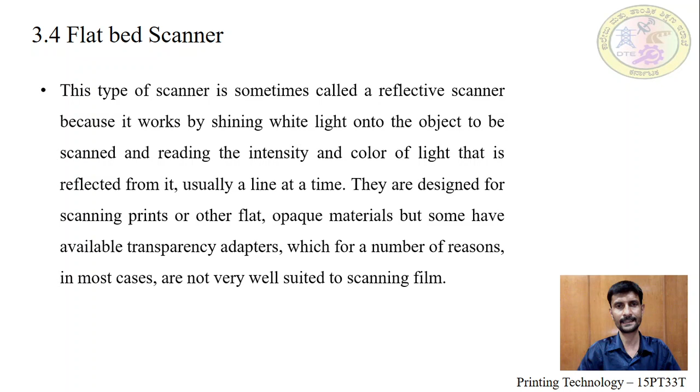It means the amount of light intensity and the reflected color decide the image quality. Prints or other flat substrates and opaque materials are also used for scanning purposes. Sometimes even transparency is also used, but the film is not suitable for scanning purposes.

Next, we will see the working principles of the flatbed scanner. Normally, it consists of a plain glass and then a light source made up of LED or xenon or cold cathode fluorescents, which illuminates this pane. This light source will move from this end to this end and after reflecting it captures the original document kept on the platform. Whatever the image is, the light source is reflected onto the mirror. According to that, it captures the image.

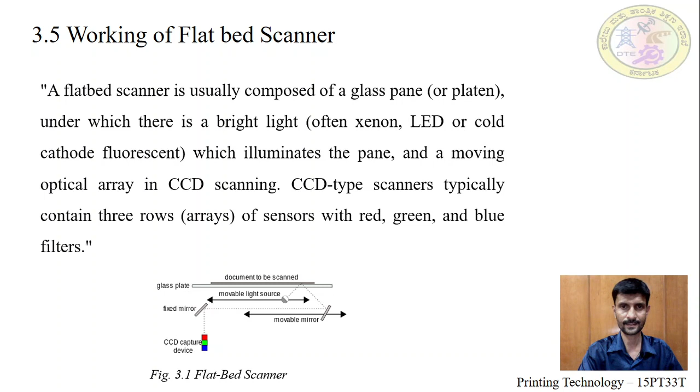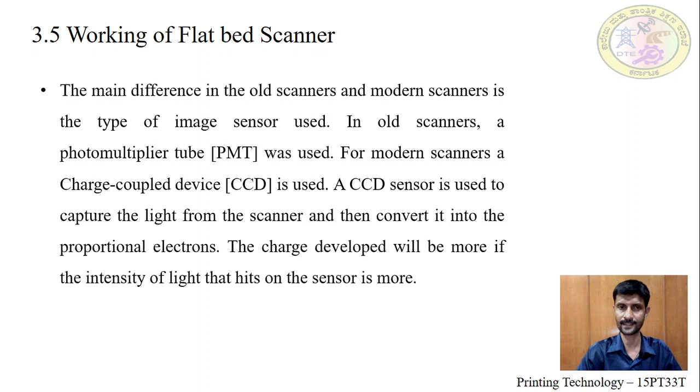The movable mirror also moves with the light source and then transfers this analog into electronic signals, captured through the CCD, charge coupled devices, which convert them into electrical signals as red, green, blue. The main difference is that in the old scanner a photomultiplier tube is used. In modern days, they use charge coupled devices, which are also inexpensive, and which convert the original into proportional electrons. The charge developed will be more if the intensity of light that hits the sensors is more.

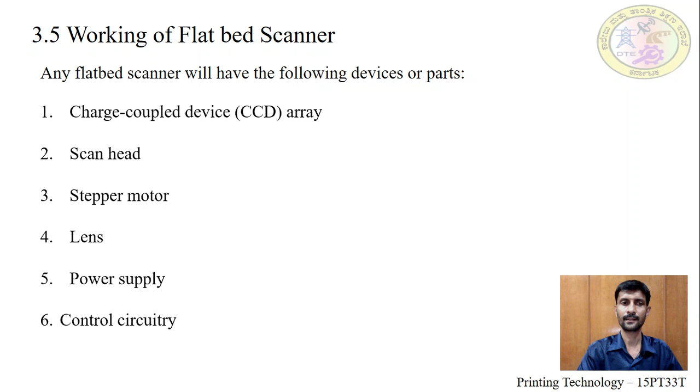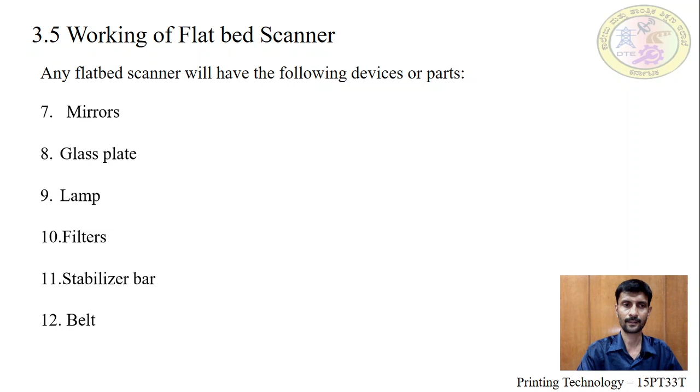Any flatbed scanner will have the following devices or parts. Normally, the charge coupled device is the main element of the scanner. Scanner head, stepper motor which moves the light source from one end to another end, lens, power supply, control circuit, interface port, mirrors, glass plates, lamps, filters, stabilizer bar, belt and cover.

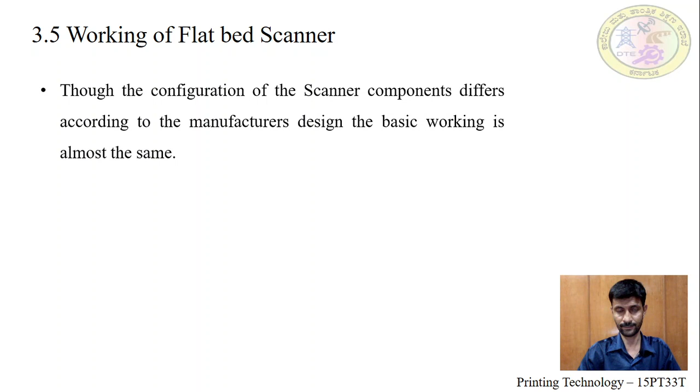Scanner components differ according to the manufacturer designs, but the basic working is almost the same. The scanner configurations of the company may differ, even the design also differs, but the working function is the same. A scanner consists of a flat transparent glass under which the CCD sensor, lamps, lens, filter and also mirrors are fixed. The document has to be placed on the glass.

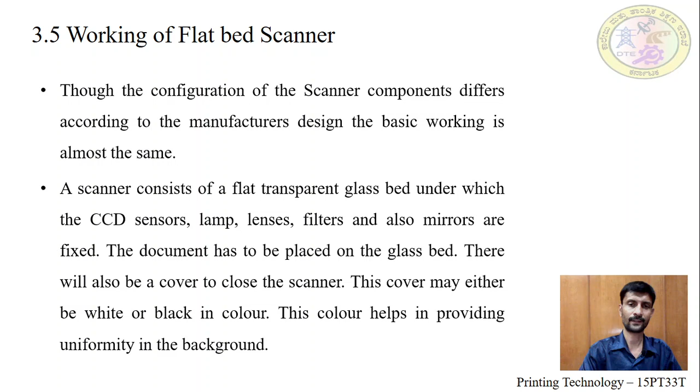There will also be a cover to close the scanner. This cover also plays a very vital role. It may be available in white and black color. It helps the uniformity of the background during scanning. The uniformity will help the scanner software to determine the size of the document to be scanned. If a page from a book is to be scanned, you may not be able to use the cover to close it. The lamp brightens up the text to be scanned.

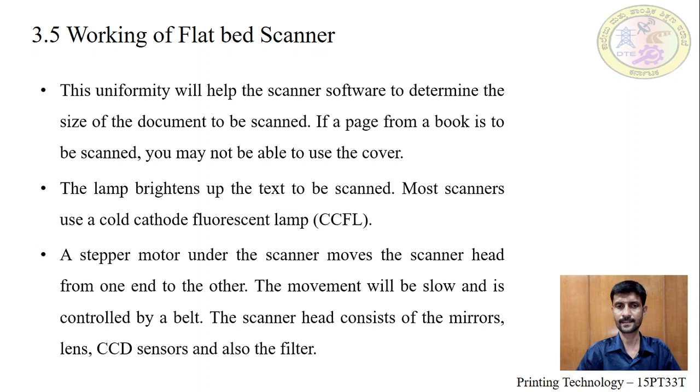Most scanners use cold cathode fluorescent lamps. The stepper motor will move the scanner head from one end to the other. The movement will be slow and it is controlled by a belt. The scanner head consists of mirrors, lens, CCD sensors and other filters. The scanner head moves parallel to the glass plate, and that too in a constant path. There are no changes in direction while traveling.

Deviation may occur in motion. The stabilizer bar will compensate for it. The scan head moves from one end of the machine to the other end. When it has reached the other end, scanning of the document has been completed.

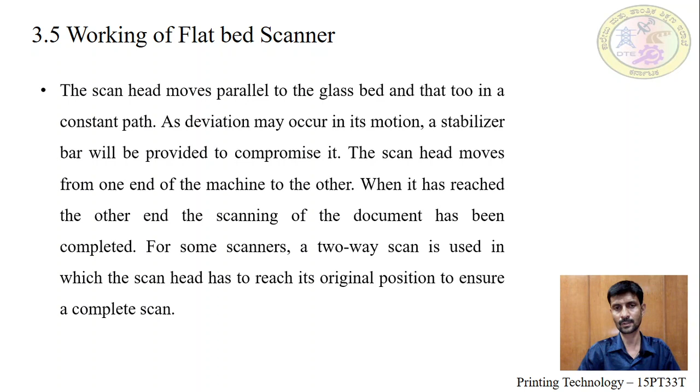For some scanners, two-way scanning is used, in which the scanner head has to reach its original position to ensure the complete scan. Single page scanning or back-to-back scanning is possible. In a single side scanner, when it transfers from one end to the other end, it completes the scanning function. If it is two-sided, when it goes from here to the other end, it again has to come back to its original position to scan the reverse side of the page.

The scanner head moves under a glass bed. The light from the lamp hits the document and it is reflected back with the help of mirrors angled to one another. According to the design of the device, there may be either two-way mirrors or three-way mirrors. The mirrors will be angled in such a way that the reflected image is hitting a smaller surface.

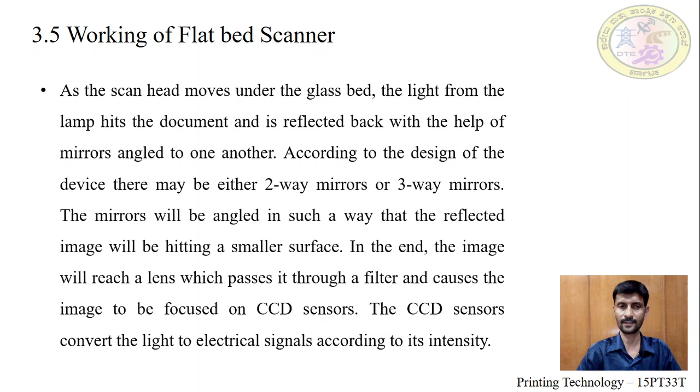In the end, the image will reach a lens which passes it through a filter and causes the image to be focused on the CCD sensors. The CCD sensors convert the light to electrical signals according to the intensity.

So this is another diagram which shows how flatbed scanners function. The original is kept on the flat glass. The light will reflect through the glass from the source according to the capturing.

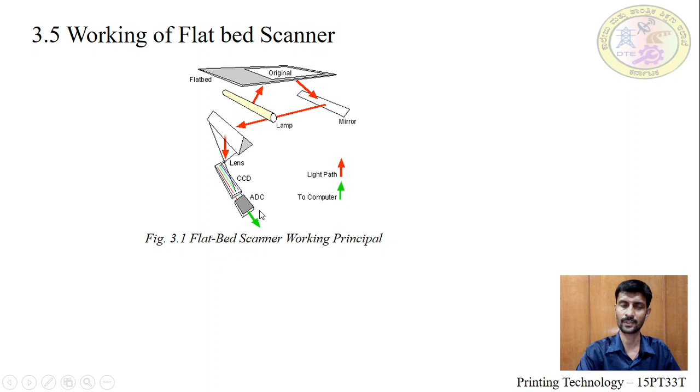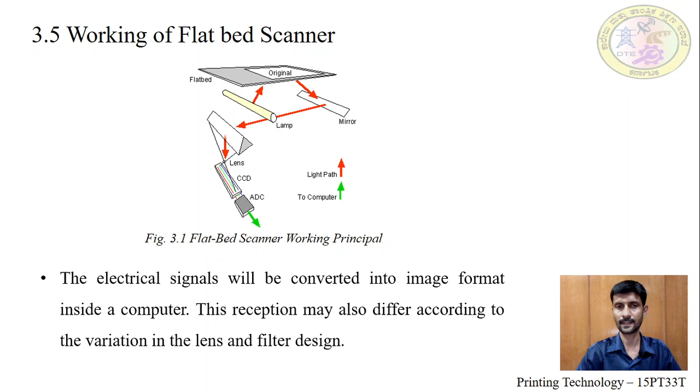It transfers to the mirror and then to the lens, and through the charge coupled device it captures the image, converts it to electrical signals, and finally sends it to the computer. The electrical signals will be converted into the image format inside the computer. The reception may also differ according to the variations in the lens and filter designs.

The method called three-pass scanning is commonly used, in which each movement of the scanner from one end to another allows each composite color to be passed between the lens and the CCD sensors. After the three composite colors are scanned, the scanner software assembles the three filtered images into one single color image.

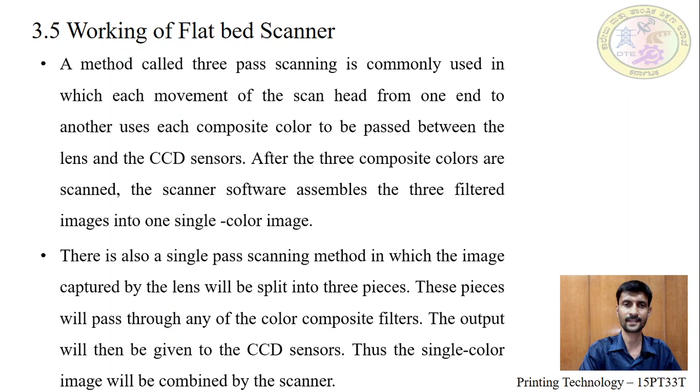Some recent scanners use contact image sensors, which have replaced the charge coupled device sensor. Though this method is not as expensive as a charge coupled device scanner, the quality of the image produced and the resolution is much lower when compared to charge coupled devices.

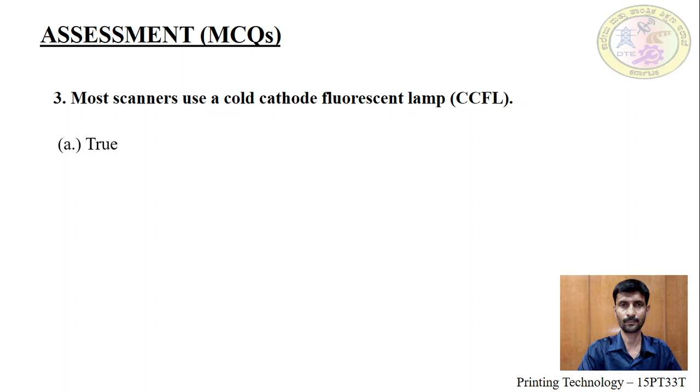So finally it combines all the colors into a single image. Most of the scanners used cold cathode fluorescent lamp as the light source. Whether this statement is true or false? Normally, the fluorescent lamp is the most frequently used. This is the answer to this question.

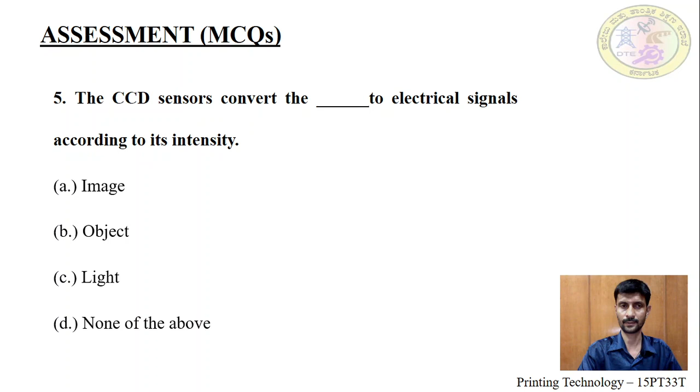Next question. The CCD sensors convert the dash to electrical signals according to the intensity. The options are image, object, light, and none of the above. Always the light source. They convert it to electrical signals according to the intensity. I thank you all once again.